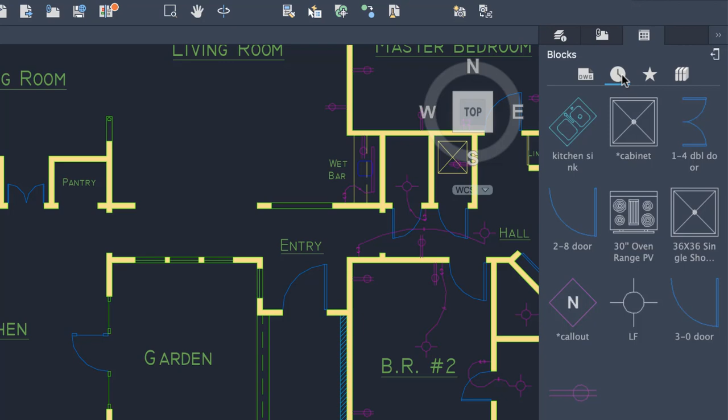Select how much information you want to see on the palette by choosing from the various list types or different icon display sizes.

It's easy to search for the exact block you're looking for. Search results can include blocks from the current drawing, recently used, favorites, and the active block library.

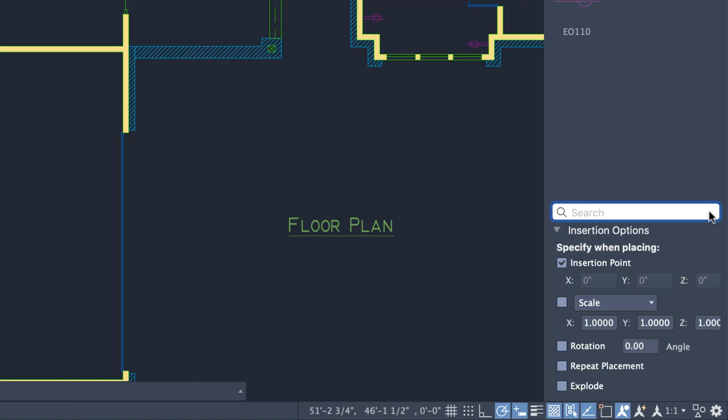Before inserting a block from any view, set insertion options like insertion point, scale, rotation, repeat placement, and more. When repeat placement is checked, press Escape to exit the command.

Place blocks from the palette by dragging and dropping, or by double-clicking on the block and placing it into the drawing for more precision. You can also browse to a drawing file for insertion.

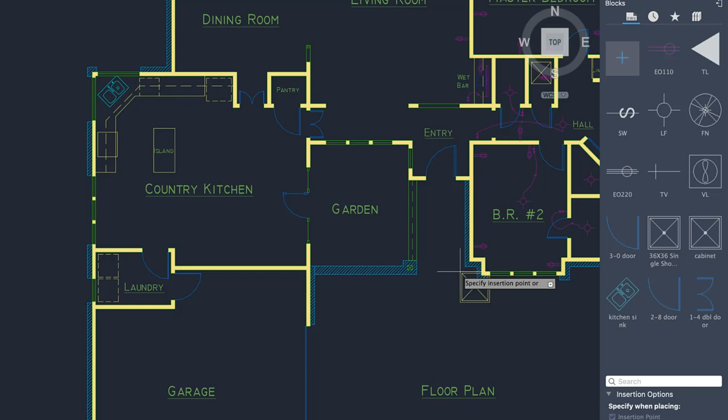The DWG Compare feature, introduced last release, has been improved based on your feedback, so that you can compare and make changes in real time. Now when you select the drawing you want to compare to the current drawing, the differences are displayed right in the current drawing.

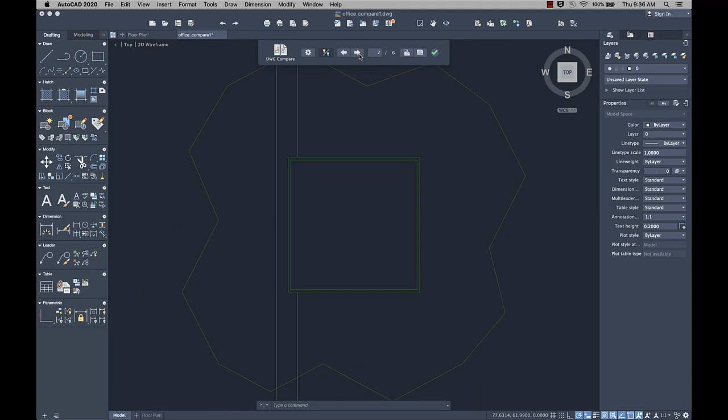Select the objects from the compared drawing and import them into the current drawing in real time. Any objects you import will automatically turn gray, indicating objects now exist in both drawings.

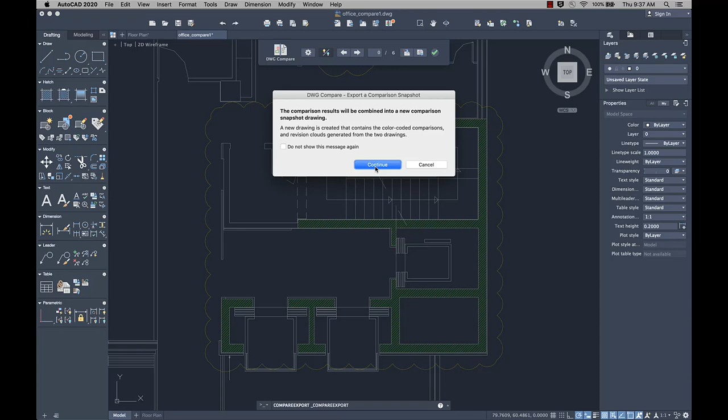You can also export both drawings to a new snapshot drawing that combines the differences between both drawings. The snapshot drawing is the same as a drawing compare in the previous release.

And when you select Exit Compare, the differences are no longer displayed.

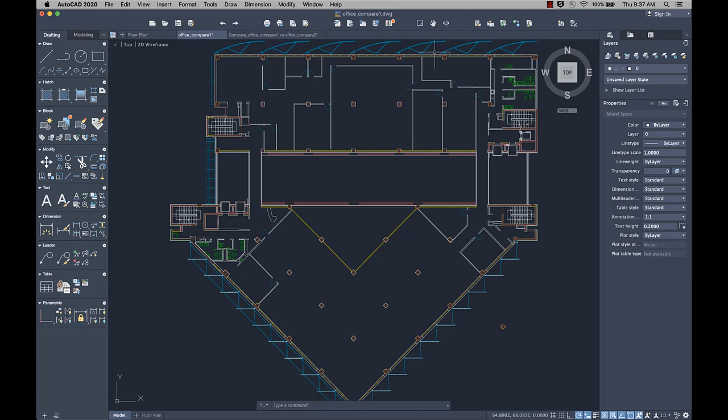Measuring distances in your drawing has become much faster with the new quick option of the Measure Geom command. You can add the Measure Geom command with the quick option to the toolbar.

When this option is active, the command displays dimensions, distances, and angles within a 2D drawing dynamically as you move your mouse over and between objects. The distance between two objects is measured only if the objects are parallel.

The small orange square in the corner indicates the lines are at a 90-degree angle.

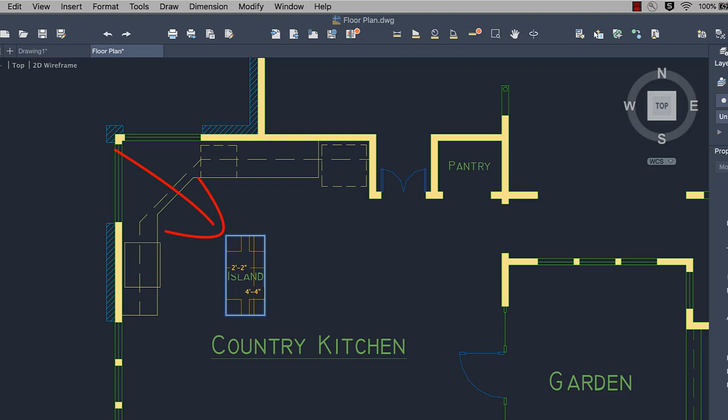Rollover tooltips have been added. These tooltips display current values of certain properties when the cursor hovers over an object in the drawing area.

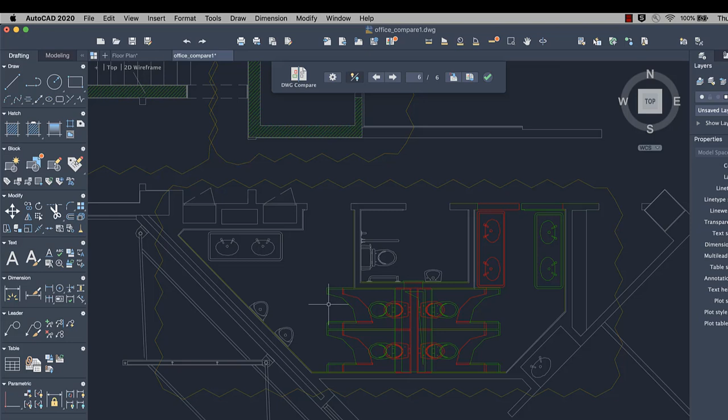During a drawing compare, the Rollover tooltip includes additional information related to the comparison. You can control the display of Rollover tooltips in the application preferences.

Support for Korean has been added. You can change the language in the application preferences dialog. Restart AutoCAD for Mac to see the language change.